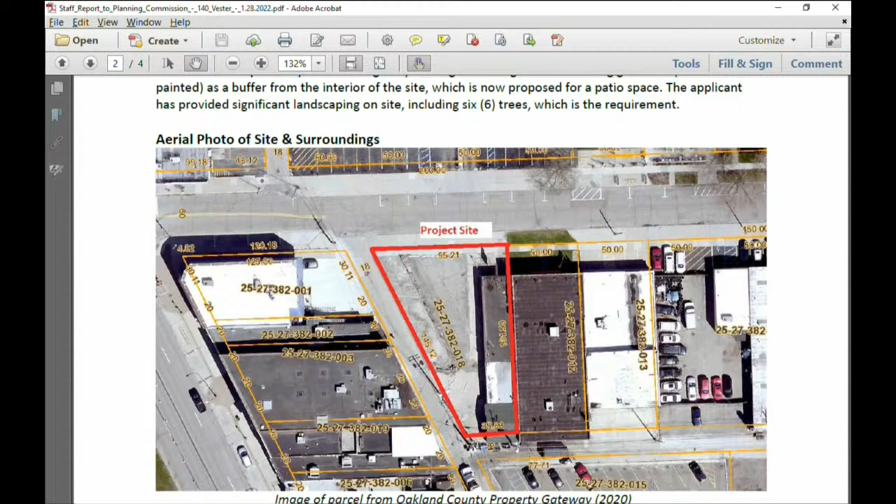Good evening, commissioners. This is a site that's been up here a few times before you. This is 140 Vester, located between Bermuda and Woodward. It is adjacent to the alley, across the street from a parking lot, and behind the Elks. This is a currently vacant glass shop, which I believe has been vacant for quite some time. It's a little bit irregularly shaped.

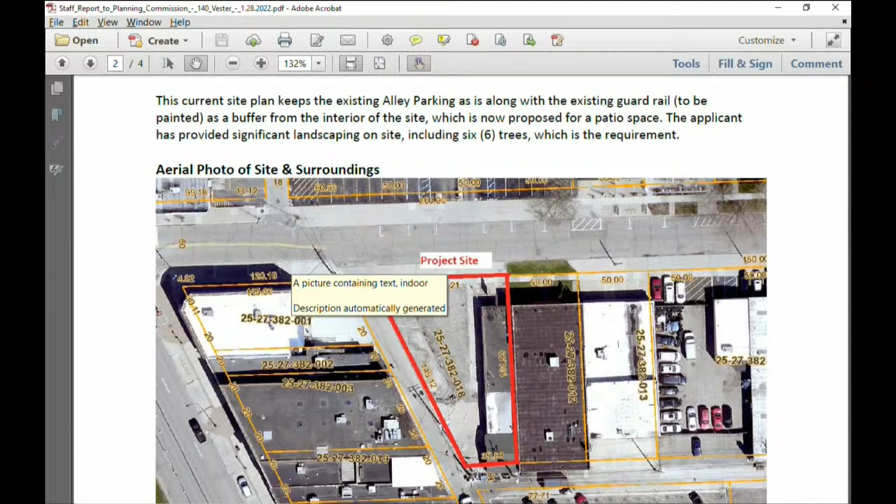This site plan came before you at the January 19th meeting, fairly similar to how it looks now. They did have some parking on the interior of the parking lot, and the parking alongside the alley was proposed to be removed at that time. There was a proposed masonry wall along the site, along the western alley line and along Vester.

We fielded some comments from the public who felt that this wall was a bit harsh. It was right up against the alley, which is already narrow for cars and pedestrians. So prior to that meeting, we reached out to the applicant and asked, what are our options here?

We looked at the ordinance and we saw that a hedgerow could be appropriate there, so we relayed that information to them. They came back at that 19th meeting with a pretty different plan, and I think the commission at that time was not ready to review it and approve it.

So this is a plan that's very similar to what was shown at that meeting. It features all the parking, the 8 spaces along the alley, to remain as they are now — that would all remain existing. What they were able to do is add a substantial amount of landscaping to act as a buffer from that parking along the interior of the parking lot and up to Vester.

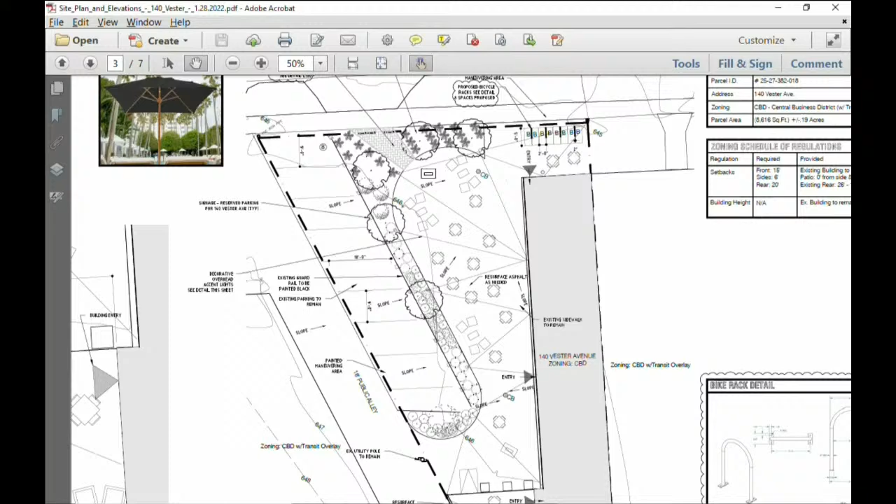Zoom out a little bit. As a reminder, there is a proposed seating area down at the adjacent side of the building, and we do have our points of entry here, here, and here. So that is where we stand right now. Really, we try to beautify it — add a lot of color and landscaping, removing a lot of blank asphalt and concrete up here at the front of the site along Vester.

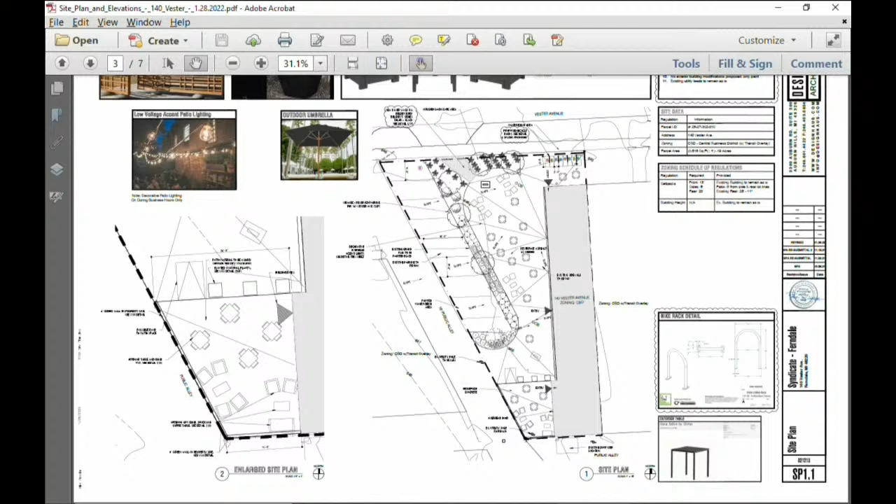Through the chair, I have a couple questions. On the site plan elevation document, you show the wooden barrier a little bit different than in the rendering. Just wondering which one you are going to use. The rendering has a horizontal look to it, while the site plan elevation has more of a lattice type. Personally, I would go with the one shown in the rendering. That would be my choice as well. Okay, the one in the rendering.

And that is only going to be in the very southern end of the property, in that patio area by the garage door, correct? Mhm. Okay, that's the only question that I have. Thanks, Councilman. Everything else looks fantastic.

Through the chair, just a quick clarification, maybe for city staff. On the rendering, you guys have the sign on the side of the building facing the alley. I know the sign ordinance requires one sign per street frontage. Does the alley count as a street frontage? Through the chair, yes, I do believe it is considered a street frontage. A lot of the language in the ordinance, when referring to parking and screening, usually lumps alleys, right-of-ways and streets into one concept.

Okay, all right, thank you. There is also a condition in the motion that the applicant submit for a sign permit, so I imagine that might come up too during that process. Other questions or comments for the applicant this evening, or for our city staff, or a motion?

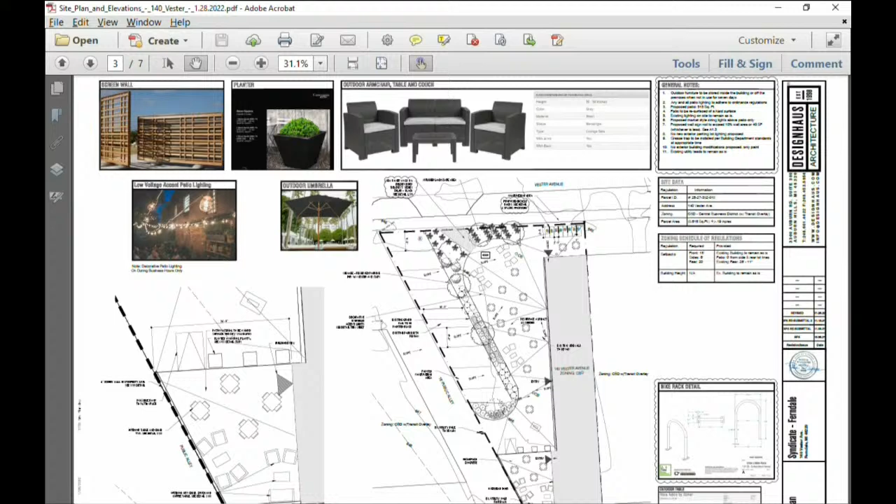Welcome to Ferndale. Yay. All right, Commissioner Brazen joined us at 6:46 PM, and we are now moving on to our public hearing. This is now item number 6A, consideration of the special land use application and site plan application at 180 Vester. This is a Vester parking project.

Sorry to interrupt, Chair Baker, what did I miss? Nothing. And before I forget, I wanted to mention, on the approval of the minutes, would it be possible that I make a new motion to table that, the minutes, until later, or can I make a new motion on that? I don't know, but thankfully our city clerk is sitting here and can help me with this. Put me on the spot. Sorry, I will actually have to check, I don't know off the top of my head.

You should be able to revisit the motion because it's still within the same meeting. I'm going to circle that and we'll come back to it when we get to our new business. Perfect, thank you. Okay, thank you.

Our public hearing, item 6A, is consideration of the special land use application and site plan application at 180 Vester, the Vester parking project. We will begin with an introduction from our city staff, then invite the applicant to share information. Then we will open the public hearing for anyone in attendance with questions or comments about the project to speak to the Planning Commission. After we close the public hearing, we'll address those comments and deliberate as a commission. So we will begin with Jordan.

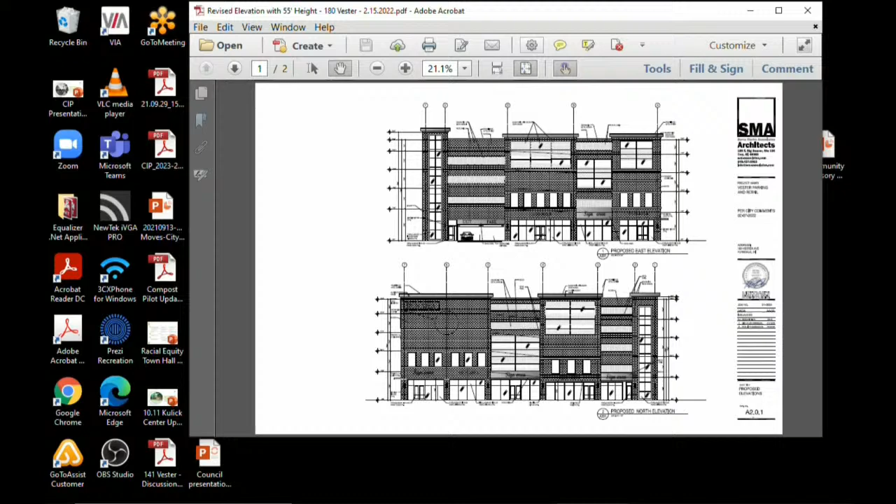When this project, if it does move forward, it'll get a project page and we'll put this online. But we do have the updated elevations, which are here. This would be 55 feet, and those 161 spaces would be across a 55-foot structure. Then there's, as required by ordinance, a mix of uses on the first floor. So I'll open it to a rendering as I invite the applicants to come up and provide any details they would like to share about their application.

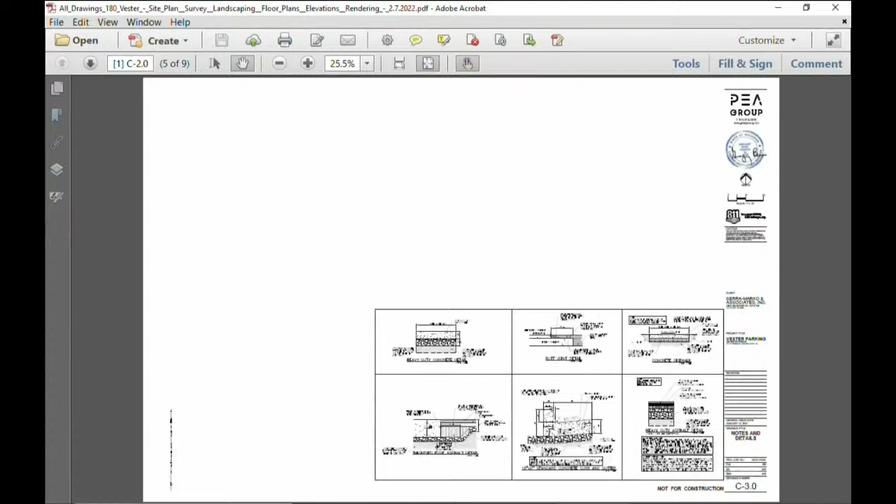Hello, welcome. Good evening, everybody. Thank you.

This project features 8,700 square feet of retail space on the ground level, with 5 or 6 stories of parking. The 5-story parking version has 161 spaces, while the 6-story version has 205 spaces.

The design intent here was to essentially give the facade an impression of different segments in order to break up the typical facade of a parking structure, and be more compatible with the surrounding sites, especially in an urban downtown area like this site.

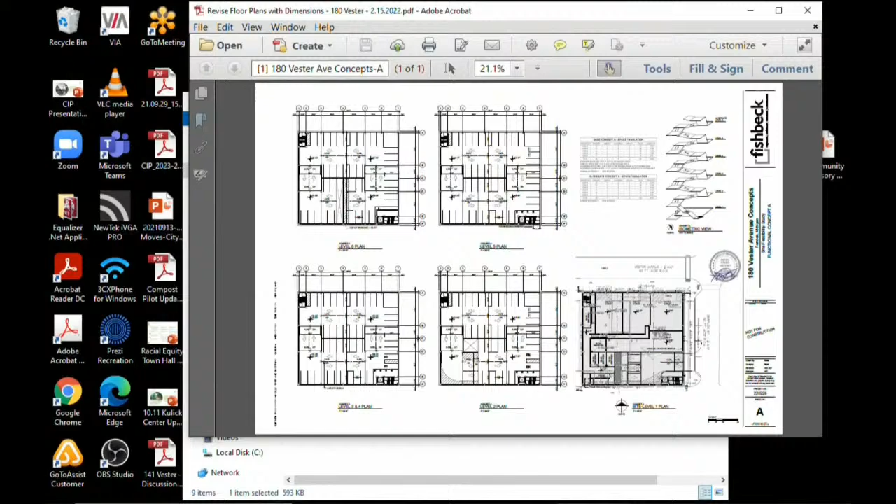So the parapet's at 55. This is the ground floor.

Basically, we have 2 facades, both on Bermuda and on Vester, of a storefront. The entry to the garage is on Bermuda, and 2 stair towers at either end.

Because the site is rather challenging in that it's small. It's 140 feet by 111... 117, I can't read that... 131, yeah, thank you.

So a lot of the ramps are within the operable tolerances, but they're steep.

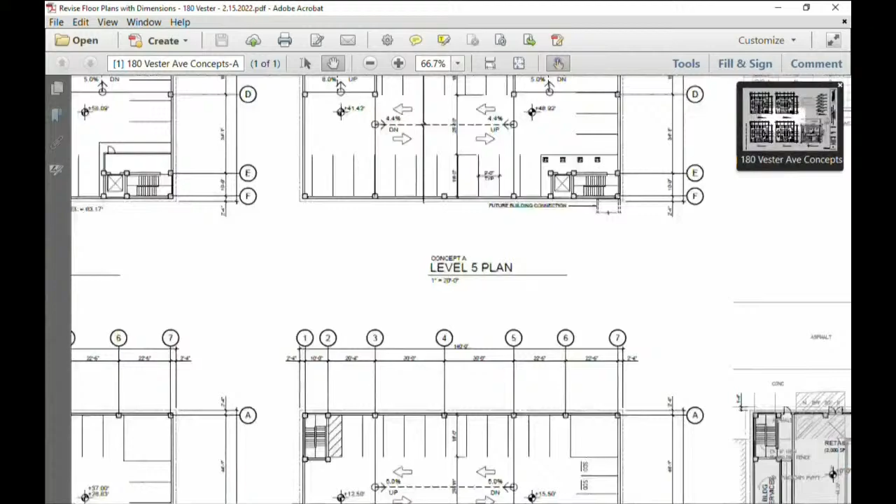The upper levels have ramps at 2 ends, the west end and the east end, with parking along the perimeter and in the center. That happens on levels 2, 3, 4, basically all the way up.

Our previous version had a roof, which created the 70-foot height. We were able to reduce it to 55 if we took off the sixth floor and the roof.

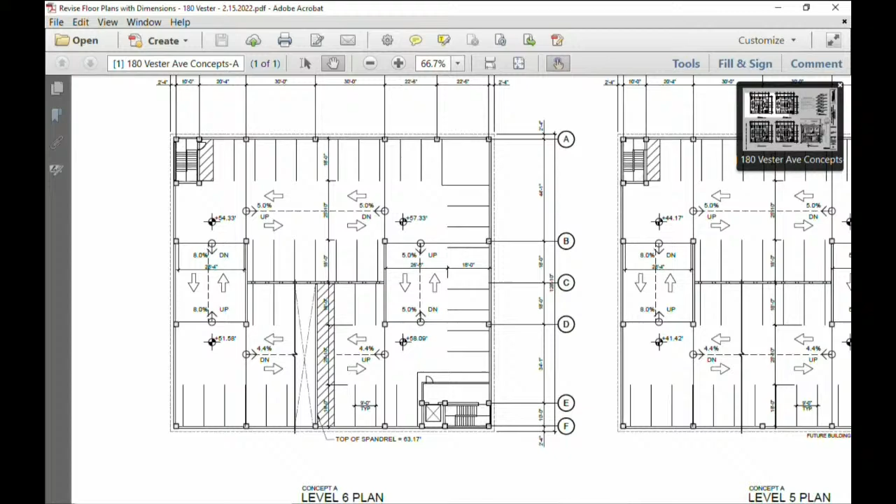The elevations: we're showing the majority of the elevation as masonry, and the ground floor would feature the storefronts. Some of the upper levels have glass as well, as part of the facade design.

There are sign bands that vary between masonry and metal. All materiality is in compliance with the ordinance, percentages and so forth.

Do you want to go through the list here? The materials list? Yes, that would be great, please. I'm looking at, yes, I think I'm looking at the same document. So, I'm sorry, you know what... okay, I must have.

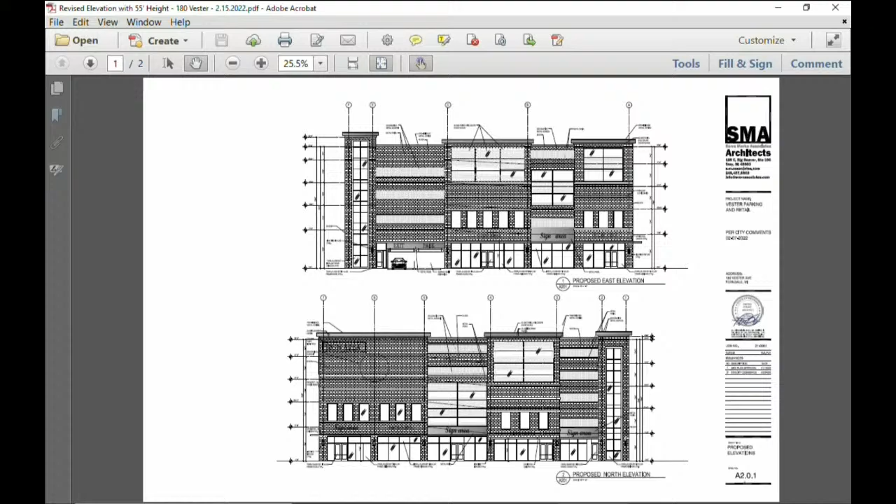We can easily put some parking between the openings, the door openings, in front of the storefronts. So in front of the retail spaces? Okay, thank you. And then I like the addition of the glass panels kind of breaking up the monotony of a parking garage.

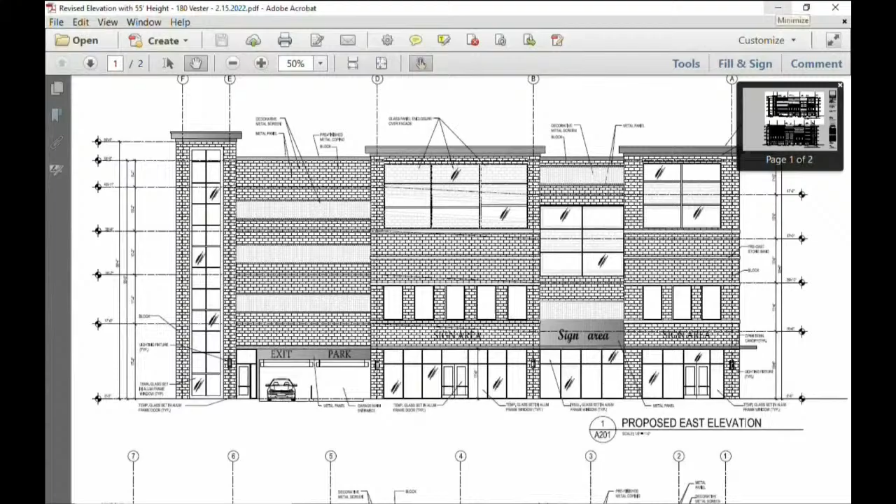My only question is, is there going to be some kind of screening if cars are parked there so the headlights don't shine out from that area? Is it like an opaque panel, how is that planned? At the entrance and exit? No, your glass panels are up higher, how you broke up the facade. How is that screened so headlights don't shine out through there? What's the plan on that? Our plan was to create walls to a height, with the openings above that. So even where we have the spandrel glass, behind it will be a little half wall, essentially, of concrete.

You mentioned that it's spandrel glass, so that's not going to be vision glass, you won't be able to see through it. Spandrel at floor levels, wherever there's a floor level, but the rest of it will definitely let in light into the space, into the actual parking structure. I'm not sure we allow... So did I answer your question?

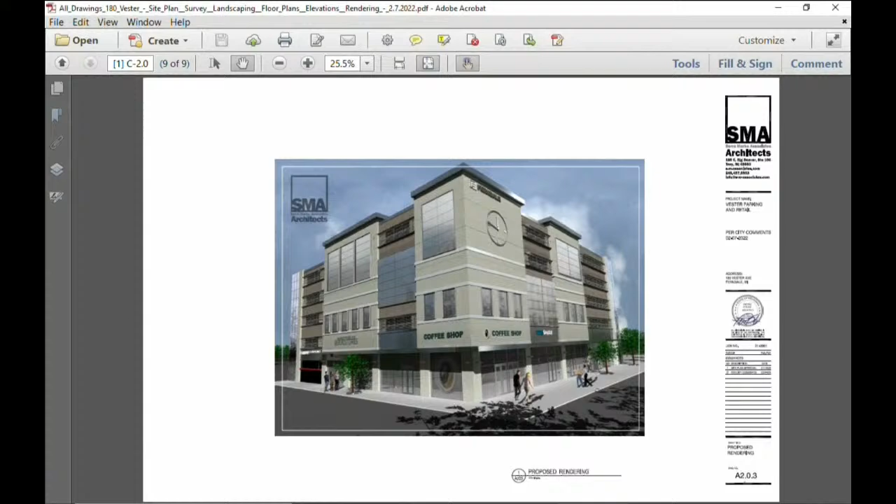Or were you unaware of it because we were dealing with Justin back then? Let me pull up the floor plans, and then I will kick it to the applicant for some of the specifics, but I could show you generally where that is. Bear with me one moment.

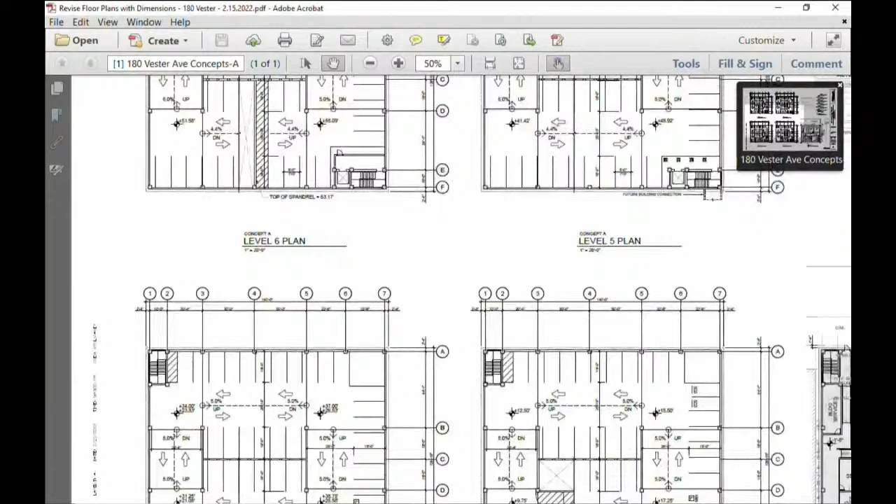It's trash for the interior, it's trash for the site, but we had talked about moving the downtown trash for that area where it's currently behind now Syndicate. We would actually move that into the parking structure, much like we have it with the DOT, where businesses within the surrounding area are able to utilize that. The city would manage the trash, all of that.

Was that a conversation with the city council or between you and Justin? No, I thought that was a conversation that we had here. Oh, was it? Councilman's actually right. I'm sorry, Chair Baker. Yes, through the chair, we approached Claire Dion after this came for discussion, so we are actively looking at opportunities.

There's the Vester Flats project that was approved, but I know they're using a chute through the whole building. We will, if this were to be approved at the building permit phase, one of the reasons I wanted to pull up the floor plans is, I'll zoom in on this very quickly.

So we learned a lot of lessons from the DOT, which by the way, when we tried to build a parking structure, there were a lot more public questions, so you guys are getting off a little easy. So it was also public land and public money.

That's so true. Please remember that. No, just had to crack a little joke there.

But one of the reasons I wanted to pull up the floor plan is there are several areas for building services contemplated, a couple that are adjacent to right-of-way and the exterior of the property. We're going to work with the property owner, if this is approved, at the building permit level to see if we could take advantage of some of those opportunities, and we're going to have Claire involved in those conversations.

We're actively looking at opportunities, both Vester Flats here, alley improvements that Vester Flats would make to the alley. We are exploring that, that's the short version. And if it's feasible, we'll try to incorporate that here, but we're not certain yet. We know some of the lessons we learned at the DOT. We're trying to plan for that space ahead of time at the permit phase and in the engineering phase.

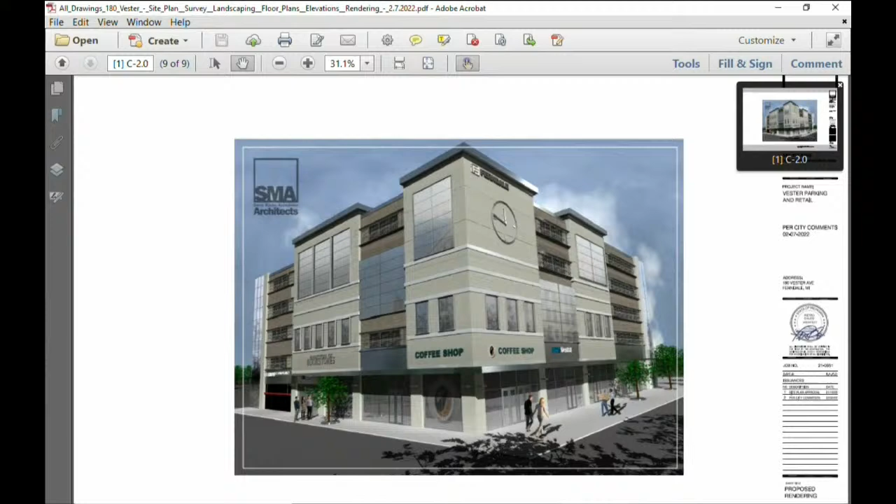For me, the colors are very cold. Given that Michigan is cold nine months out of the year, I would encourage you to use warmer tones as opposed to grays. That's just my particular like and interest. Is it because it's February, Councilmember? It's always February, except when it's July.

I trust that architectural compatibility guidelines will be gone over with the staff, particularly in relation to color compatibility? Okay, of course, yep. And that's all I have. Otherwise, I think it's great. Actually, if I could continue.

This was really what I was looking for in a design when this project first came up. I really wanted something that looked like an office type building, something that wasn't a parking structure. You know, we don't want a car jail in the middle of our downtown. So I think you did a really great job at hiding the fact that it's a car jail. So thank you.

Thank you, Commissioner Showalter? Yeah, looking at the plan with a little bit of a different eye, I know it's a conceptual plan, it's not quite there, but just watch out, you have some pretty big dead-end corridors there. In terms of how the cars navigate? Now, in terms of the first floor, there's a big dead-end corridor that is accessing that first retail space, and it's against Michigan Building Code.

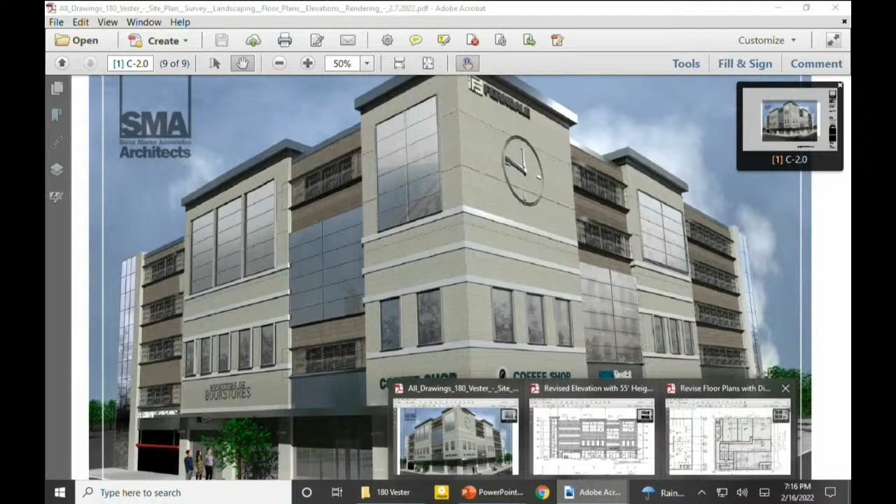Thank you. Yeah, I think this right here, it doesn't open in the direction of egress, and if this retail outlet's closed, they won't have access to it. Thank you. Other questions or comments from the commission?

Got a question about lighting. I was going to bring up lighting as well. I have a couple of others, but we can go for it. Maybe I'll start with my others, then start with lighting, since I wasn't necessarily involved in a lot of the discussions with the DOT. I think we have some learning and feedback about lighting. But I'm going to actually start with...

So it was mentioned about the 30-foot setback for the parking. That is a first floor requirement that I believe is met. Okay, sorry, I thought I must have just misunderstood when we were going through the opening there. So I just want to make sure that was cleared up, that is met.

And we had pulled up the rendering, and it looks like that glass is reflective. Is that intended to be? Semi-reflective, just to mitigate heat gain, essentially. I don't know if it'll just need to meet the percentage that's allowed, I guess, for the reflective.

I don't know how standard versus retail frontage is regulated. I'm not sure if we actually, I know that I've worked with ordinances in the past that are very specific to the type of glass that we can use. I'm not sure ours is, but I think it is for the retail frontage, but I don't know about for the upstairs, because the structure can use the standard glass, as long as it's meeting our requirements, I suppose that works.

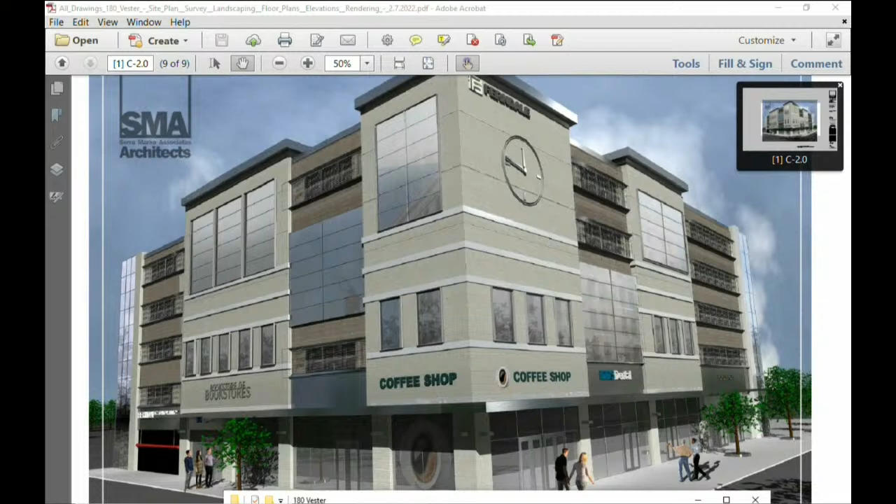For this site, because the parking structure footprint is rather small, a lot of it has to go into ramping. For instance, hold on, let me show you. But it just seems like there is quite a bit of retail. I don't market retail space, so it's not in my expertise to understand whether or not you can market a smaller retail space, but if that was a possibility. Sure.

So one option would be to inset the facade to allow for space that's covered, or actually there's a portion of the edge here that's covered with an awning. The other option would be we could probably design a space to allow for it indoors, but it would take, obviously, it would be at the expense of retail.

It just seems like you have a lot of building services space. There's probably like a good 1,000 square feet of building services. I'm just wondering if maybe the space right behind the stairway on the north end of the building could actually just be utilized for bike parking. Yeah, we can explore that.

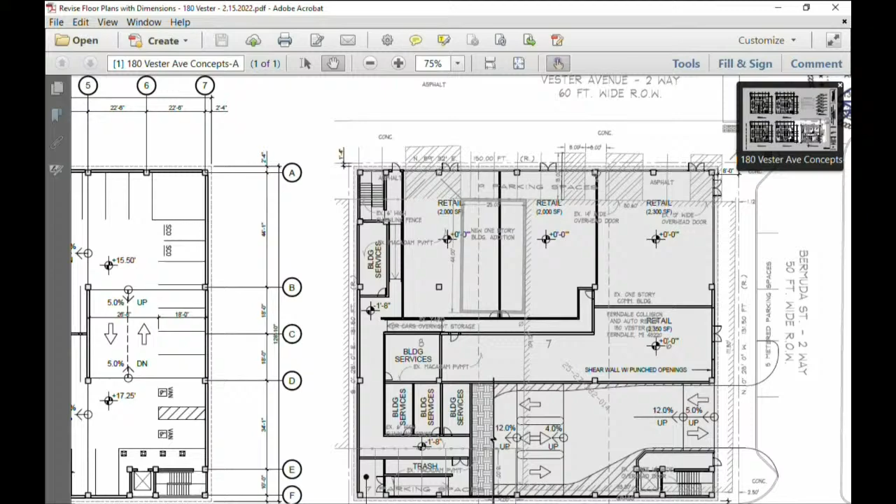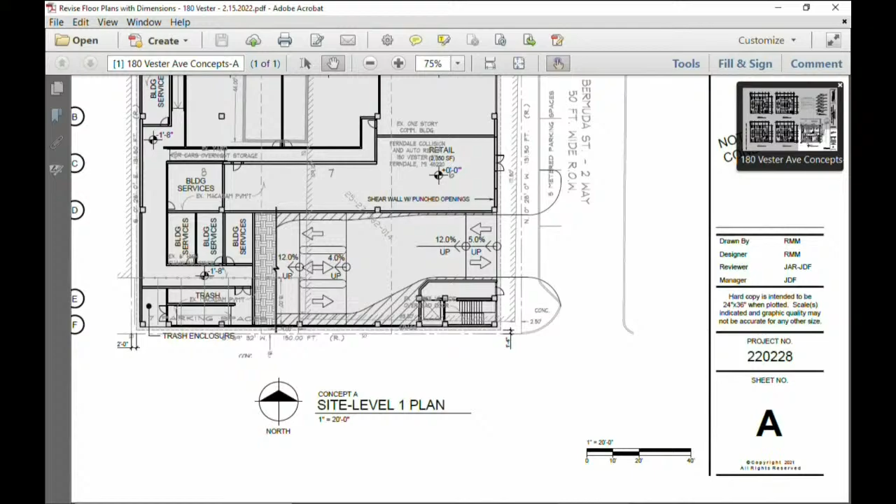Just a clarification, so obvious—we're looking at plans dated February 7th, correct? The revised plans, stamped. It's 2/15 for the revised plan. 2/15? It should be yesterday, right? Yes, it's Untitled one, right there. Here, 2/15—oh, good eye. A201 looks like it's 2/7, and then we have the revised floor plans, sheet A would be 2/15, is that correct? Yes, for reference for the motion. Sorry, it's so particular—it says per city comments, 2/7, and then the others are revision 2/15. Okay, all right.

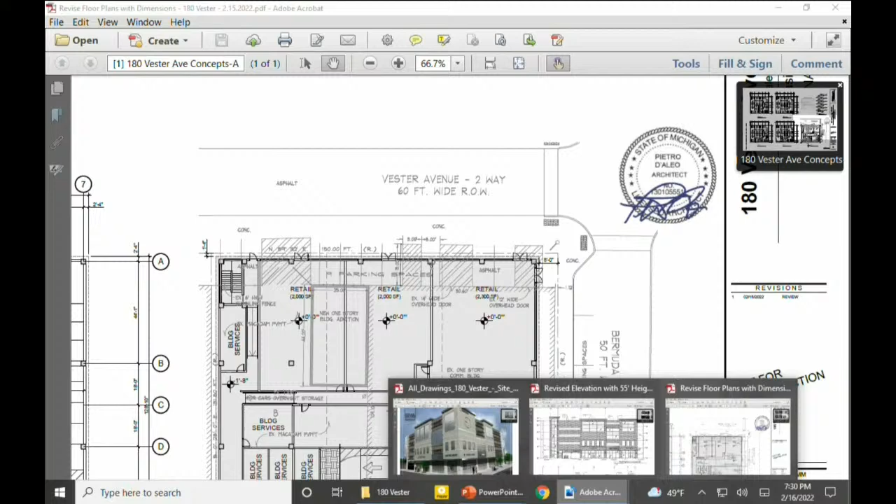Other questions and comments from the commission? I've got one last question for our city staff, probably a Kyle question—sorry to put you on the spot, but it's about open area. Thinking back to Vester Flats, about how we reduced the open area requirement, do we need to include a condition allowing a reduction of open area?

So I could actually tackle that one. Hey, hi everyone—I love how much you're reading the zoning ordinance. So fun. We actually did not see an opportunity in the ordinance for you to provide a waiver, because that was a PUD. Right, so what we have in there is a condition that requires them to comply with the 10%. Yes.

One item we had submitted the question on - I don't know if the development team had a chance to answer it just yet, but we weren't sure if the 3.7% that they were providing included the proposed landscaping in the right-of-way areas. If it did, and they're at 3.7%, so it did not include that.

So what we would propose is to allow that to be included in the calculation. That's one of the reasons we wanted to finalize that at the administrative level. The way staff was prepared to look at that, hearing that it wasn't included in the 3.7 was helpful. But knowing that also requires council approval, staff's approach was going to be to work with the applicant to find a way to create that space.

We talked about, for example, the architect talked about insetting the building to allow for additional amenities. We would work with them on that. One of the things we will do is work with the applicant to see what that calculation is, including the landscaped right-of-way areas, to see if that provides the sufficient percentage.

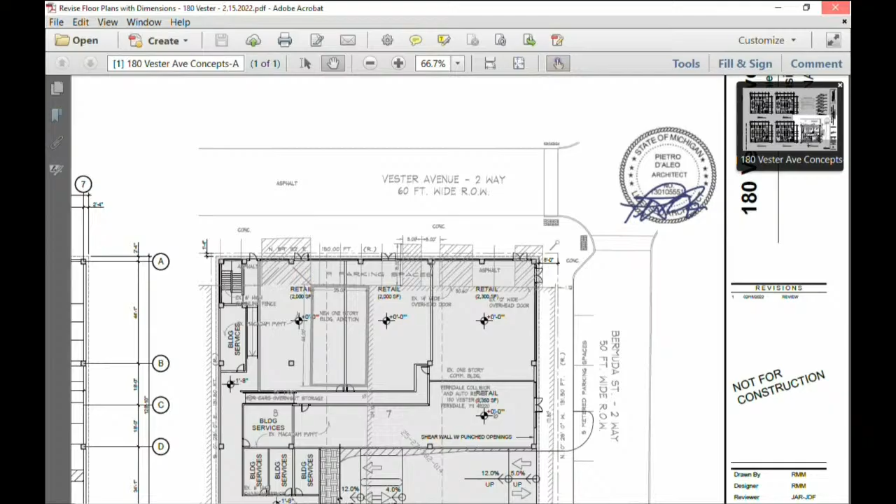The first is the discussion of a restaurant concept at 23250 Woodward. I will invite our city staff to give us an introduction, then we will have the applicant come up and share any additional information they would like to.

Good evening again, Planning Commission. This is just a discussion item only, at 23250 Woodward, the southeast corner of Woodward and East Maplehurst. I've got a few views up on the screen of what this looks like. You may or may not recall, but this used to be an auto repair facility. In 2016, it went to the Planning Commission and also the City Council to be converted to a carry-out restaurant. Also in 2016, they did receive special land use for an outdoor seating area.

I think the restaurant has changed hands a few times. Most recently it was Babylon Garden, I believe. So they do still have the same configuration of the exterior areas: there's a parking lot in the rear, and then there is that outdoor seating area in front.

The applicant is here tonight. They would like to convert this to a standard restaurant. So it was approved as a carryout restaurant, which does have a notably different parking requirement.

With a carryout restaurant, I think you only need 6 spaces per carryout station plus your employees. On the final plan approved in 2016, they needed 8 spaces. I think they worked out to get 7, and maybe there's a lease with the company across Maplehurst to the north, so they got their parking requirements.

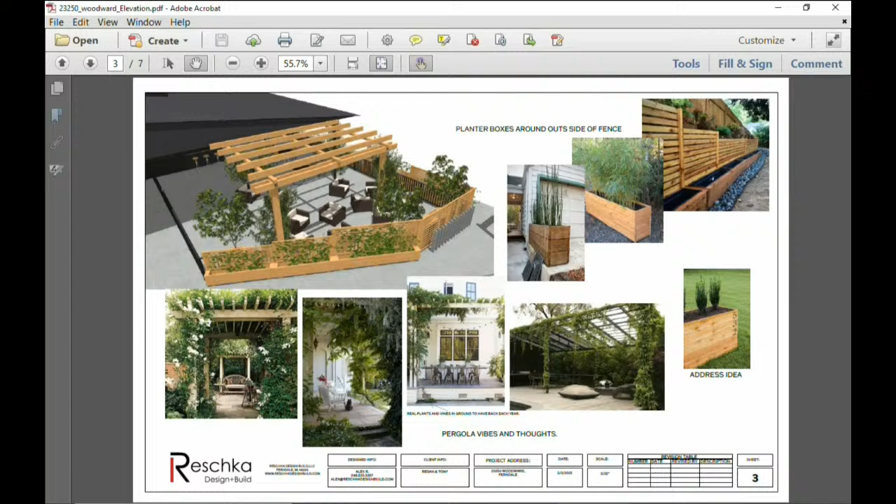But some of the more cheery news is that they are proposing some really interesting outdoor elements and, of course, an overhaul of the interior. So I would like to invite the applicant up to go over those changes, and we can continue on with the discussion as you see fit. Thank you, Kyle.

Evening, Madam Chair, members of the Planning Commission. I'm Kelly Allen here tonight with the team that is going to be One Ton Tomato. I'd like to introduce Regan Bloom, she would be the owner, and her partner, Tony Montelli. And this is Alex Reschka, he is the designer.

Welcome, thank you. So as Kyle said, it's a really nice project. It's been vacant for a little while. Regan is known to the city because she owns Toast in Ferndale, which is next door, and she's been very successful there. So we think some of the parking challenges can be met because of her relationship with herself next door, and the different hours.

Toast, as you know, is primarily a breakfast and early lunch type of establishment. This will be a dinner type of establishment. So maybe Alex can address the parking more clearly. We will be asking for a liquor license here.

And we'll be asking for what's called a redevelopment license, which I'm sure you're familiar with. We need to go through the city council to do that, and the state of Michigan. Several things have to be demonstrated to both the city and the state to get that kind of license, in terms of a minimum requirement for investment and seating, hours of operation, those kinds of things.

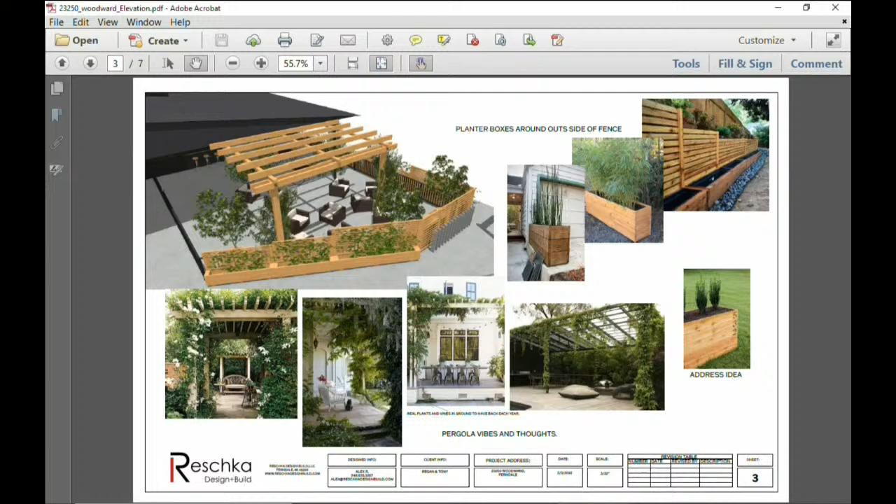A good drink program, casual, but still a place you could bring a date to. Not a bar that serves tacos, so I'm trying to move away from that. I feel like when I'm in Ferndale these days, I'm having a hard time finding places I want to go eat. It's either a straight up bar or super high-end, and I'm trying to find the medium.

I also love that it's right next door to a place I already own, super easy for me to manage and utilize my staff back and forth. I'm super excited about it. We've been throwing around a lot of design ideas and things I've been thinking about for a long time, wanting to start a different project than Toast, so it's fun for me to do something new.

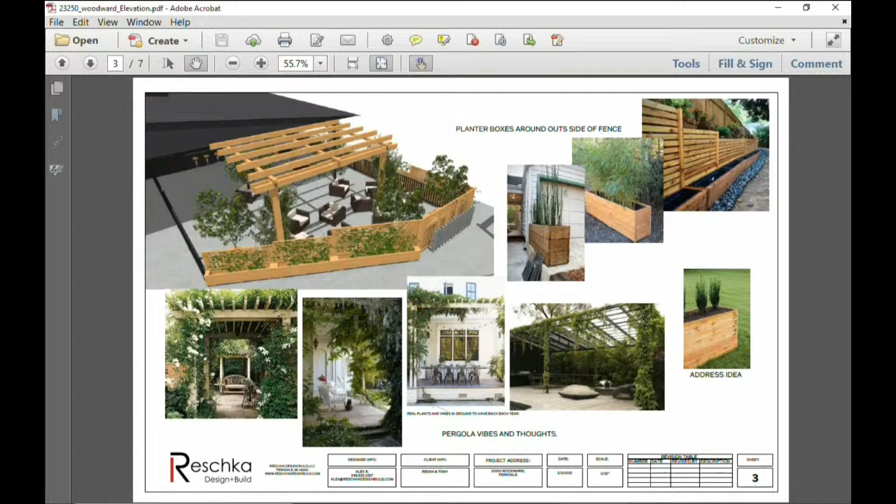Also, I didn't put it on here, but totaling it all up, I tried to get there's 33 parking spots available, but we're also going to do bike racks, like right on the corner, and there's going to be bike racks in the back.

So this is the patio. We'd have the bike racks right there in the corner, and then in the back of the building, back here, there's a bike rack there too.

Would that bike rack take up a parking space? No, I just know parking is really tight back there. Let me see if there's... so this is the back of the building, and just the way it's angled, it's like a dead spot right there. That's what you guys talked about earlier with the dead zone.

So we don't typically count those public shared on-street spaces in our parking counts. Like the 3 here, or on Woodward, or down the ones on Woodward in front of Toast.

One of the things that could be helpful here is thinking about your complementary hours. That was something either Kelly or Regan mentioned. So talk to us a little bit about how these two businesses and parking lots interact, and how you would kind of control and police that, because I know everyone who goes to New Way parks in the Toast parking lot at night, right? So in order to really reserve that for a different use, there's going to need to be some type of different regulation or use. I wonder if you could talk to us about the functionality of actually marrying these two spaces, hours of operation, and policing of parking.

I mean, obviously more aggressive signage. Oh sorry, I just want to make sure Regan's at the mic. Okay, unless you've got something, Kyle? Through the chair, I just wanted to add—sure.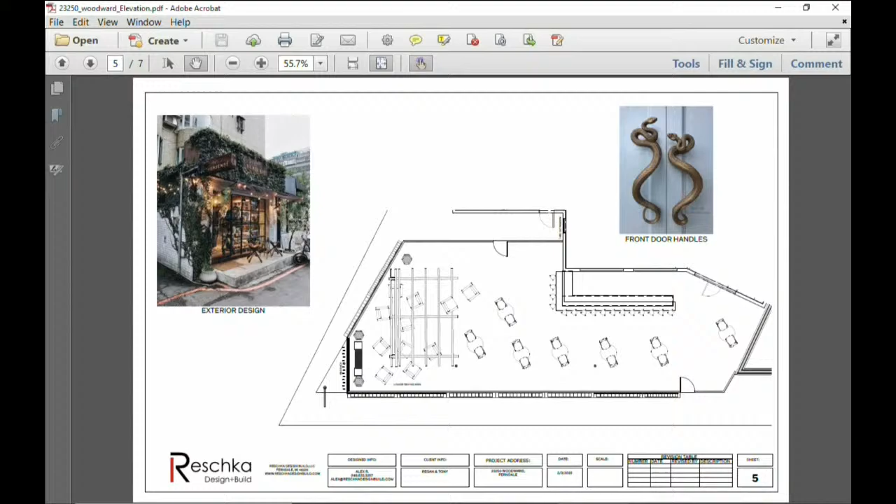First, one question about the layout again, if you can pull back up the floor plan. Where was the proposed front door again? Right here, yeah, there's two entrances in the front, and we were going to utilize the one that has a vestibule.

Such a funny shaped building, it's hard to tell. It is, hard to tell which end is up. Where's north? You just passed it. There we go, it's near the bottom. Now that I know it. Okay, that's not it there.

There you go, here we go. So see that front vestibule right there? Yeah, we just thought that would be the smartest way. And then it's also under the covered patio, which is nice, so if it's raining or people are waiting to come in, it's covered. That's the Woodward side, and then the other door will be for service staff to come out and service the patio.

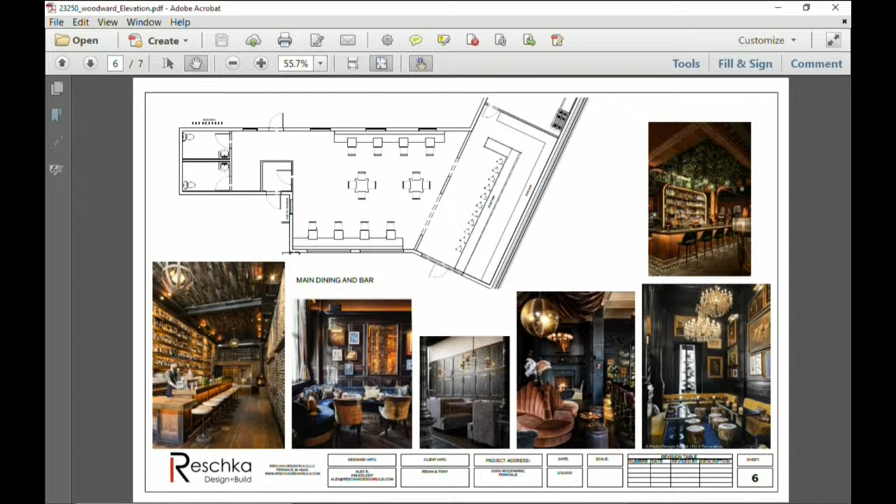If I may make a suggestion to promote walkability, if I were a resident coming from south of Woodward and walking, that's an even farther walk around to the front door. If there was the opportunity to enter off of Woodward, there's a little door right there in the fence.

Okay, and will that be accessible and open for anyone when you're in business? Yep. Because then you've got a door here that goes right into the inside as well.

That's good to see. This is probably a question for city staff. With their proposed privacy wall and pergola in the front, is that allowed per the ordinance, or is that a special use? We've had a project come to us in the past with similar proposals that I don't think we supported, for the outdoor sales area at Bloom's in C2 - is that what you're thinking of? Correct. I'm not familiar off the top of my head, but I can explore that approved option.

And patio - I think it's an existing approved patio seating, right? It is, but I think they're proposing to expand it. Expand it, add a pergola, add an overhang? So keeping the same footprint, just adding the pergola. If you look at it, it's the same footprint of where the fencing is now. It looks a lot larger than where the fencing is now, because actually the corner where your pergola is, that part is currently just open concrete. So that would be an addition on top of that, plus the structure and the overhang.

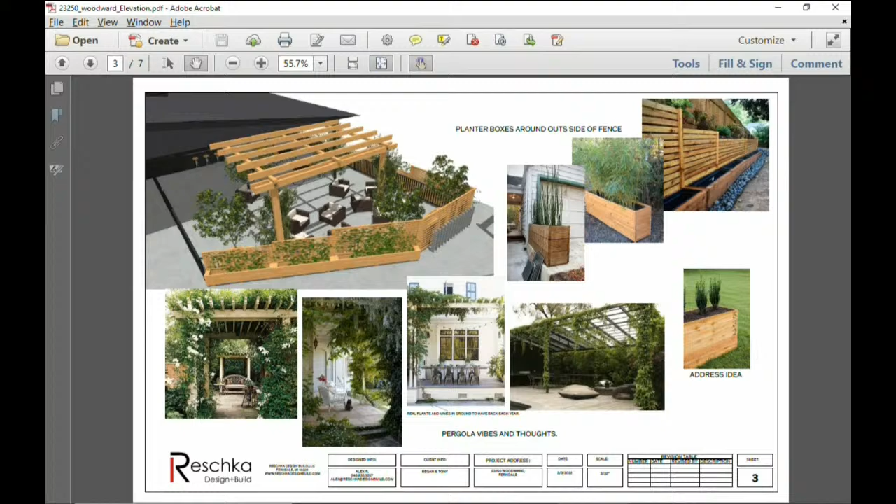So you said you didn't approve it - do you like that concept or not? What's your thought on that? It didn't conform to the ordinance, and I guess my only thought process is always thinking of the pedestrian experience. I see you've done a different variation on the wall heights, which helps out a little bit, and you have a bit of planting, which softens it a little.

Still, making sure it's always accessible on Woodward, because as a pedestrian you don't want to walk against a flat wall, even if it's covered. But we opened it up in the middle there, and I gave you a picture of that build-out, what it's supposed to look like with some greenery in front of it. So we were just talking about not wanting something flat - people still want to see slightly out into the street. Exactly, and I know I'm getting in the weeds here a little bit.

There's a lot of weeds here, we're good. This can change pretty easily, but you'll have to adjust the swing of some of your exterior patio doors that will be swinging into the sidewalk at that point - into the right of way.

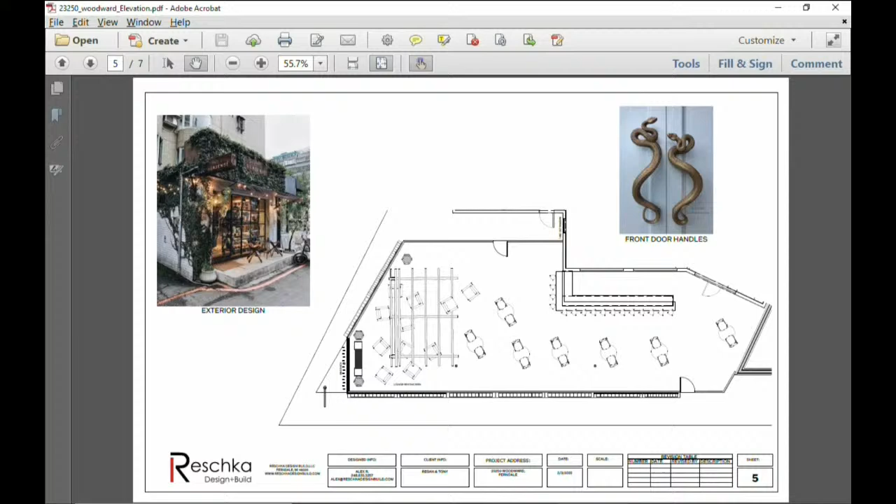Will be swinging into the right of way because you'll have more than 50 people. Thanks, Commissioner Showalter. Just to add to your parking point, when you're saying how they're going to know to park at Toast, with signage a lot of their staff can park at Toast at that point. That's actually what I was thinking. Do you make it staff parking down at Toast and then they walk? Then you just know to grab those spots right away. Exactly, and you would know then that your customers have the spaces closest to the building. Correct. When I worked in retail, that was always our requirement, we had to park.

I think that would be an interesting operational way to handle it. But having lived here for so long, the first thing I thought was no one's ever going to be able to park at Toast because everyone from the New Way parks at Toast. So just thinking about how you'd operationalize a shared parking agreement between the site and Toast, how the hours would complement each other, and how you'd enforce whether staff parking is at Toast, or just how you'd use that shared parking agreement will be important for us to talk through.

I think it'd be nice here, like this fence that's up, so if people are trying to park in there, put signage right there to say there's additional parking in the back of Toast. That's a perfect spot to do so. It wouldn't be like going in and then seeing it on the back wall of the building. You'd see it.

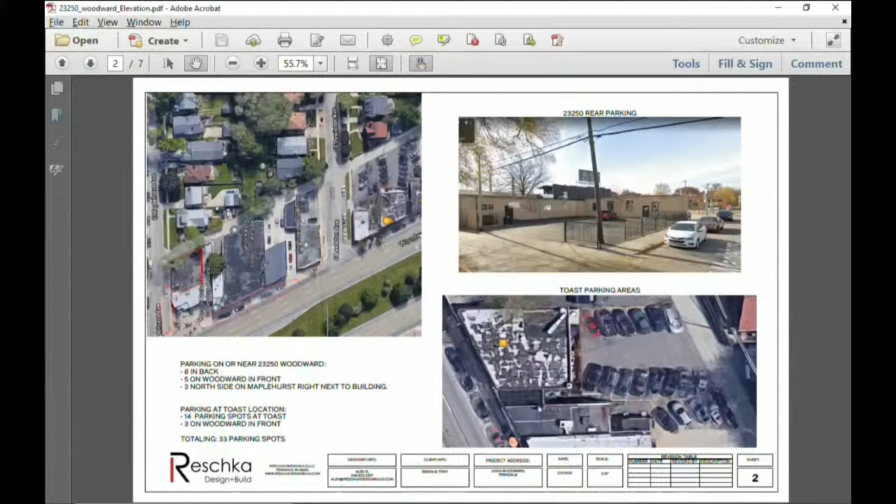Question about the balloons discussion. C2 outdoor sales and display? That was because they were going to show their product that they're selling on the outside. Wasn't it into the right of way? And it was into the right of way.

No, I still think it was on their property because the building has a setback. They were, but they were showing their wares that they were selling, and that is not what this is doing. If you wanted to give Kyle a heads up, there might be a difference in that definition.

I just think the addition of this patio and rebuilding the street wall visually with the pergola and stuff like that is a great value add on a dominant corridor in the city. I think it's just a matter of working with staff to make sure it's consistent with the zoning requirements. I think the discussion here is really more of a technical one that can be coordinated with staff.

That's one of the best selling points of the space, the patio. Yeah, that's totally underutilized, and it's a great opportunity for leveraging it well.

I'm actually kind of all for creating a little bit of a higher patio, similar to what they have, and not having a really low patio area, because it helps continue the building line, because right now there's this weird jog in at that corner, and that corner isn't really super well defined. But if you can carry that line from the sidewalk, that rebuilding of the street wall will benefit any future business.

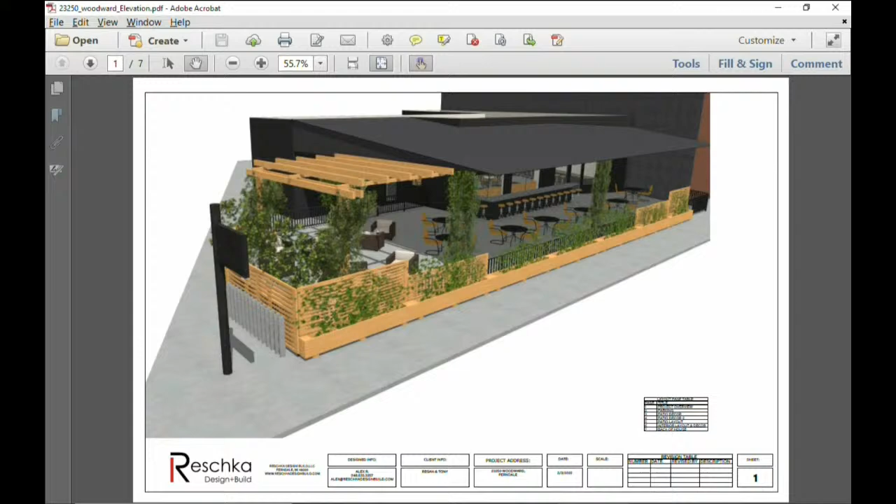Okay, item number 8B, this is discussion of 915 East Drayton, Ferndale Food Hall. We'll start with an introduction from our city staff, then we will welcome the applicants up to share. I think we've got a draft layout and any other information that they brought.

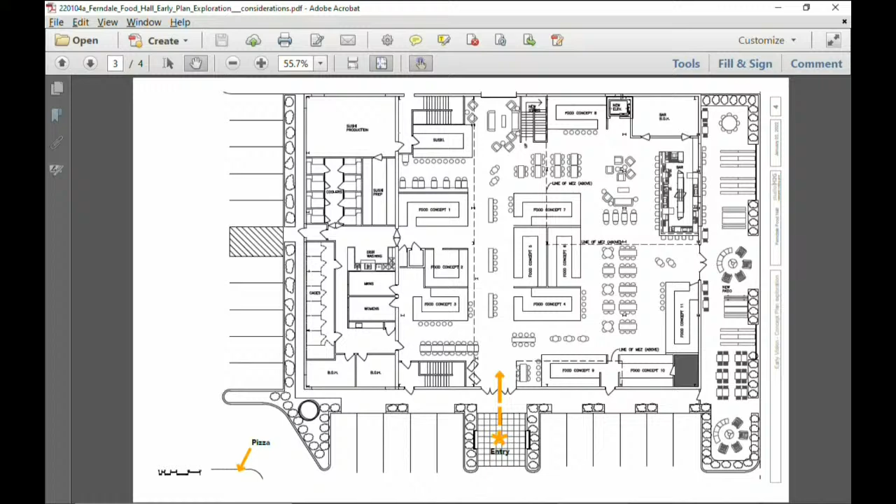They've been discussing different options and they came up with this, which is a very exciting concept. I'm going to let them get a little more in the weeds on the actual workflow of it all, but I want to touch on a couple of things before I pass it over to them. As I mentioned, this is what we feel is really a great concept for this area.

Okay, it's an industrial area. I do seem to remember seeing something in the ordinance saying that we're allowed to do residential above buildings, right? So it seems like you would want to introduce some other uses in there. And there seems to be a path through PUD to allow a use like this in this neighborhood.

Nearby, you have a coffee shop, a brewery, there along Woodward Heights, and there's been some discussion of other residential developments in this area, so it just seems like this could be a great thing and a catalyst to really make this an exciting project.

We did note that in the master plan, under goal number 2, there was a discussion with stakeholders in the area, and they recommended the exact things that are already listed for a PUD requirement, which was retail storefronts associated with product manufacturers, cafe dining establishments. So it seems like there's not only a way to do this right now with the PUD, but it also seems to be the vision for the city moving forward.

Right now, as mentioned, these buildings are existing. So to orient you, north is to the right.

The proposal is to keep the envelopes pretty well as they are. This is very, very preliminary, very conceptual at this point. There might be questions you have that we just don't know yet. We wanted to take the temperature of the Planning Commission and see if this has legs or not, so there would be some improvements to the parking lot.

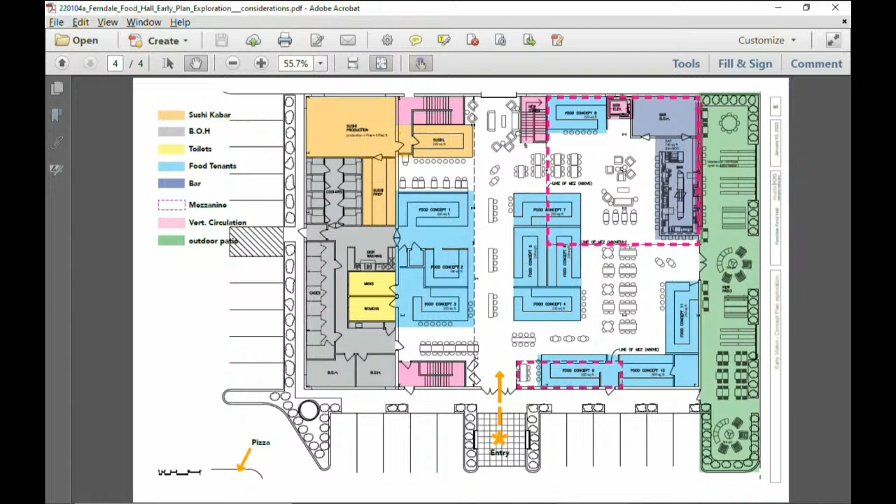The owners hired H2G to do the design work. They do these types of projects all over the country, and they're doing a great job. They master planned this so there's seating scattered throughout, a nice outdoor dining space, and things may flow over to the other building to the east. We're not sure yet, but we're still working through a lot of those details.

So, you guys want to see anything?

I'm Tom Violante, I own Holiday Market. Patrick Van Lin, Sushi Kabar. We owned Sushi Kabar together, and we created it, started in my grocery store, and it started working in other grocery stores. Now we have 120 grocery stores throughout America. We were looking for a headquarters, and we came across this building, and the building is way too big for what our use is, but the building is amazing.

We sat and collaborated, and said this could be an amazing food court. There are challenges with the food court - one is the parking, we'll talk about that for sure. But with quality food and being community-oriented, along with Patrick's expertise in managing food booths, together we have a management team that will make this work and be a great community amenity, creating a draw to Ferndale, a draw to excitement. We just think it's an amazing project.

Thank you. Is there anyone here in the audience who had questions or comments on this project this evening? Well, welcome. I'm going to see if our commissioners have questions. Who wants to kick us off with questions for the applicant or for our city staff?